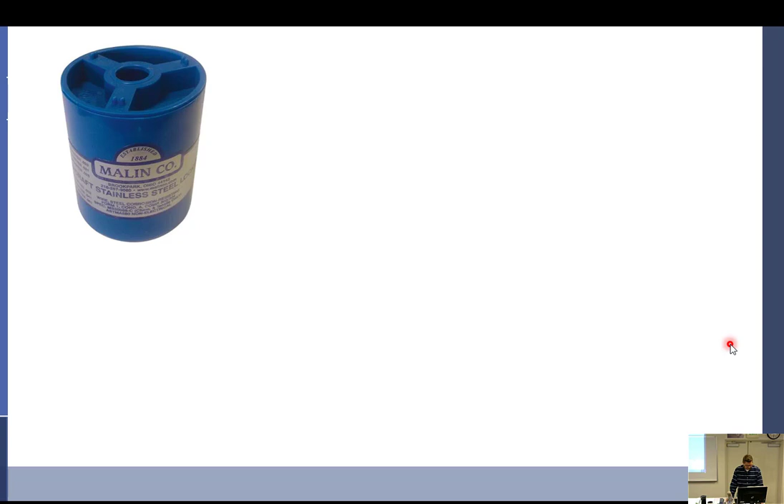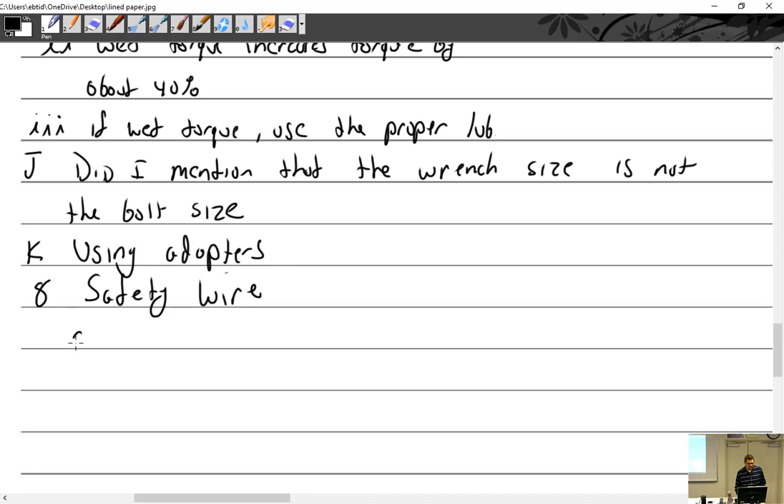Safety wire. All right, so safety wire comes in several sizes. Safety wire sizes. I'm being redundant here, sorry. And then why is that IV? I don't even know. So let's just fix this here. We'll just say this: safety wire sizes. It comes in 0.020. Oh, this is stainless. Stainless. So first of all, it is stainless steel wire.

What does stainless steel mean? Corrosion resistant. What kind of steel is that? It's a mixture, isn't it? Well, mixture is not the word I want to use. It's an alloy. So it's steel with a lot of additive, nickel. It's got a lot of nickel in it. Carbon makes it very brittle, so you've got to be careful. Carbon makes it strong but brittle.

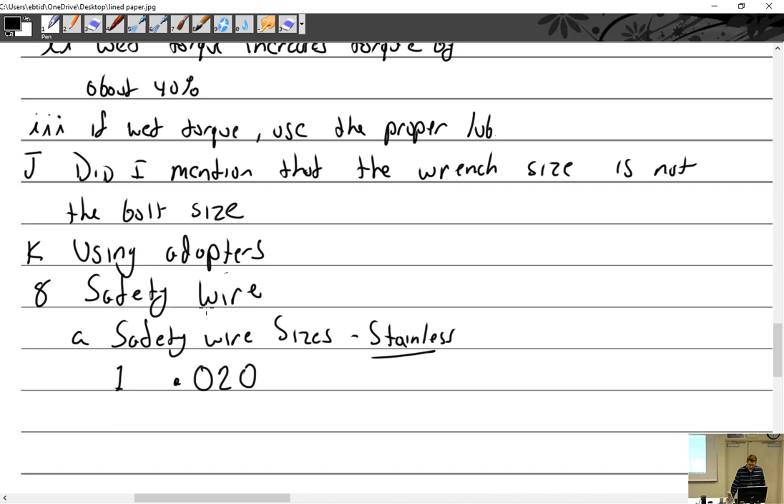So all right, 020. There's a lot more sizes, but I'm going to give you 3 of the main go-to. If you look at my toolbox, you're going to see 3 cans, and these are the 3 cans that almost every mechanic's going to have. So we have 020, and I'm going to give you the book definition, all right?

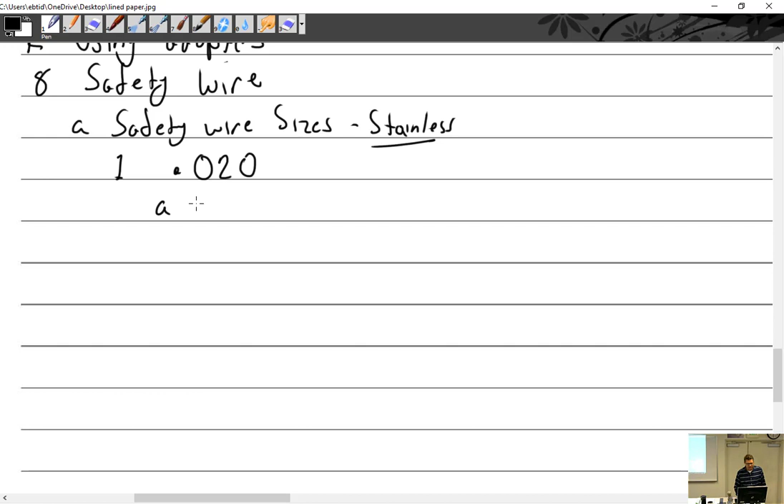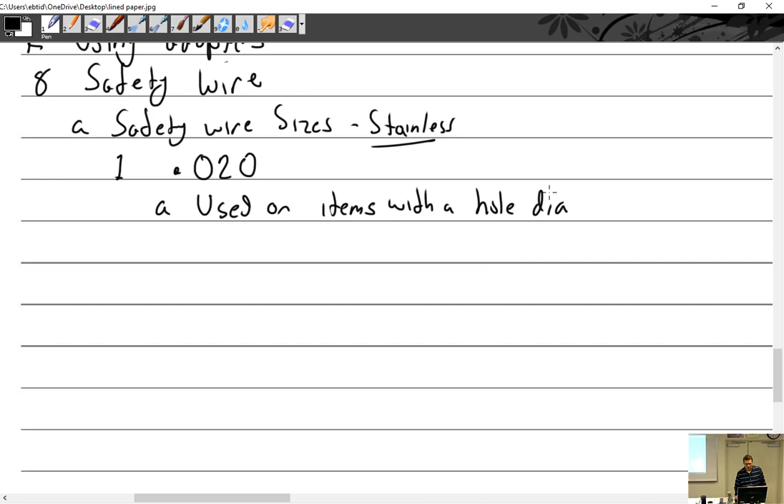It's just right out of the book: used on items with a hole diameter of 0.045 to 0.062 with, this is the key right here, spacing less than 2 inches apart. So if your screws are less than 2 inches apart and they have holes drilled in them that are between these, you could use 020.

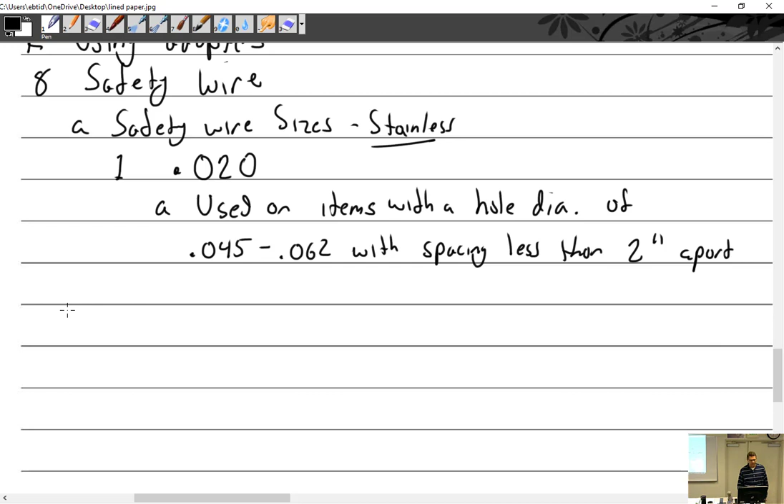Okay, the next one is 032. 032 is your most common. It's your go-to for pretty much 99% of what you do. 032 is going to be fantastic. The book says for hole diameter larger than 0.045. And I'm going to add this, over 2 inches apart.

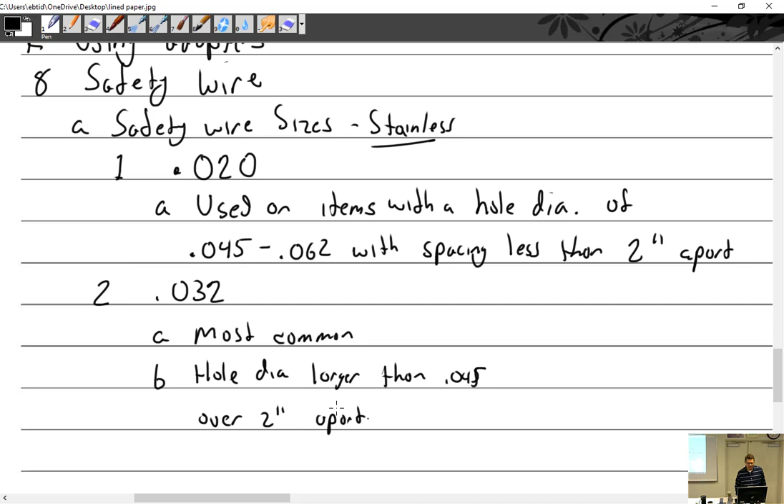Now do notice this is not an error. Hole diameter of 0.045 to 0.062, and this said hole diameter larger than 0.045. Well, 0.062 is larger than 0.045, so that makes little or no sense, doesn't it? But it's over 2 inches apart, so that's what we're going to do. So almost always I'm just going to grab my 032. I'm going to use 020 on little screws and small parts. Otherwise, I'm going 032.

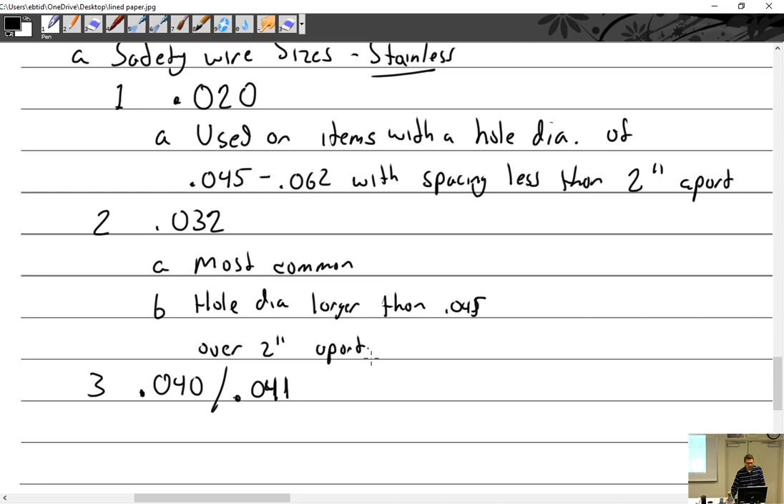If I don't use 032, I'm going to lump these together, 040 and 041. Yes, there really is a difference. I don't know the reason why, but they actually make 040 and 041. And this is almost always going to be used on propellers in general aviation. Typically used on prop bolts. One manufacturer, like McCauley, says we want you to use 040, and Hartzell says we want you to use 041. And I could have that backwards.

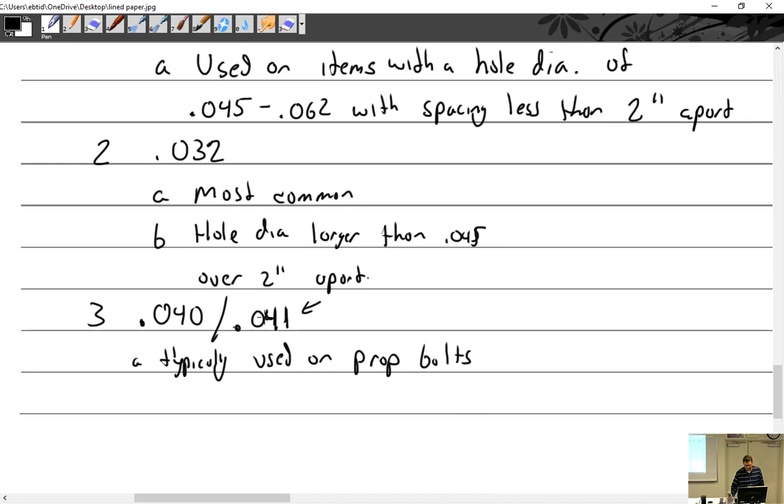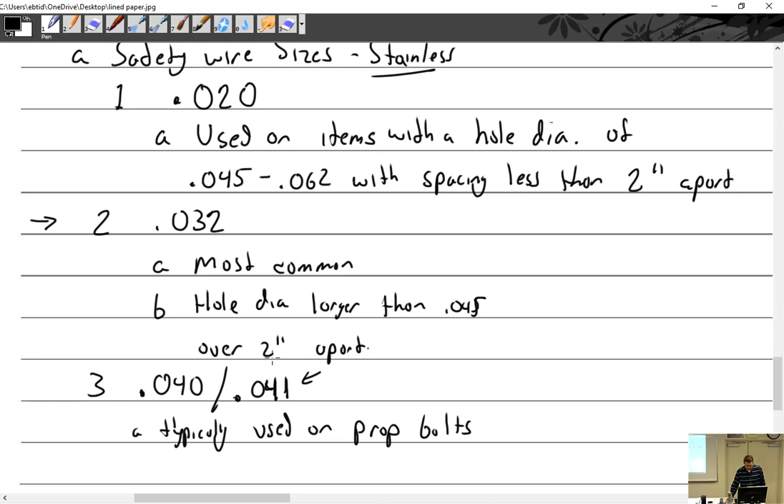It doesn't matter. So I don't buy a can of 040 and a can of 041. I buy a can of 041, because whichever one says use 040 or bigger, well, 041 is bigger. So it meets the specs for both. So those are the 3 most common types. The stuff you're using in lab is going to be 032. So I have 020, 032, 040, 041. And what is it made out of? Stainless steel.

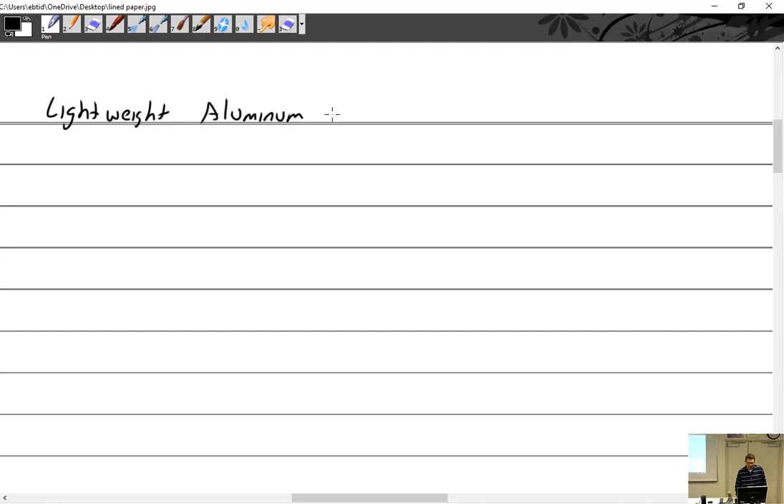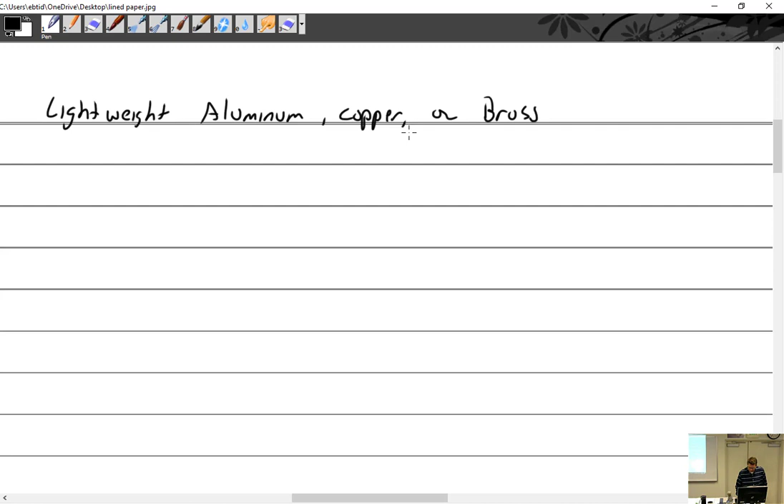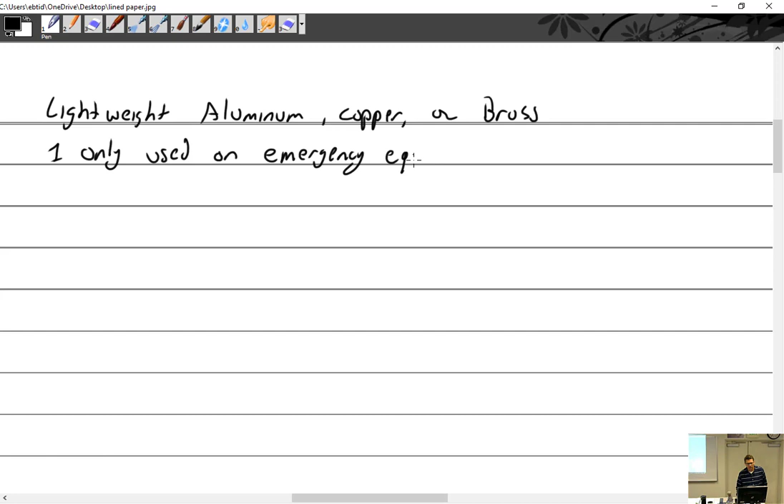In addition to the stainless steel, they also make another type, which is lightweight aluminum. Never actually seen this myself. Copper or brass. I'm not sure, it's just a gold color. And this is only used on emergency equipment. Like shear wire? Yep. Where wire must be broken by hand. What was the third type of wire? 040 or 041, I put it together.

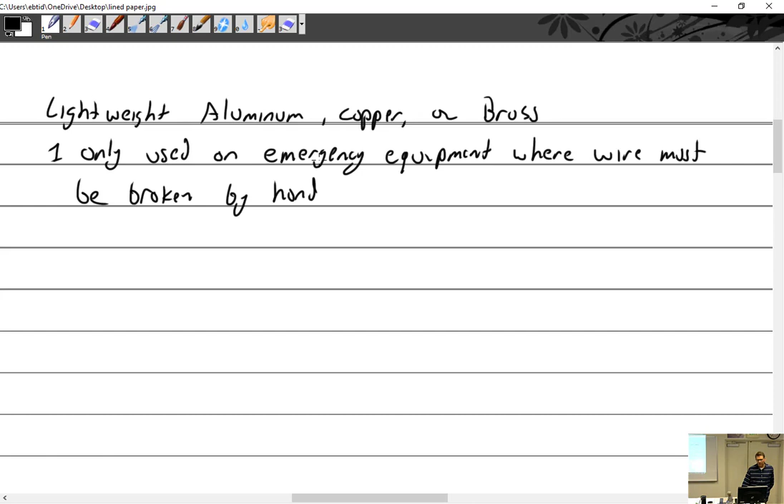There's actually a little more to that than just emergency equipment; it's equipment that must not be inadvertently energized. You'll see sometimes in cockpit switches that are actually safety wired. They don't twist it, by the way. It's just one simple strand on a cover. You lift the cover, you break it, you flip the switch.

You may see something like that on a fire extinguisher, on an escape chute, something where in an emergency it needs to be broken and deployed, but you want a piece of wire on there so kids won't yank it, or somebody will look at it and go, wait a minute, this is wired, I wonder if I should actually do this. All right. So used only on emergency equipment. All right, how to safety.

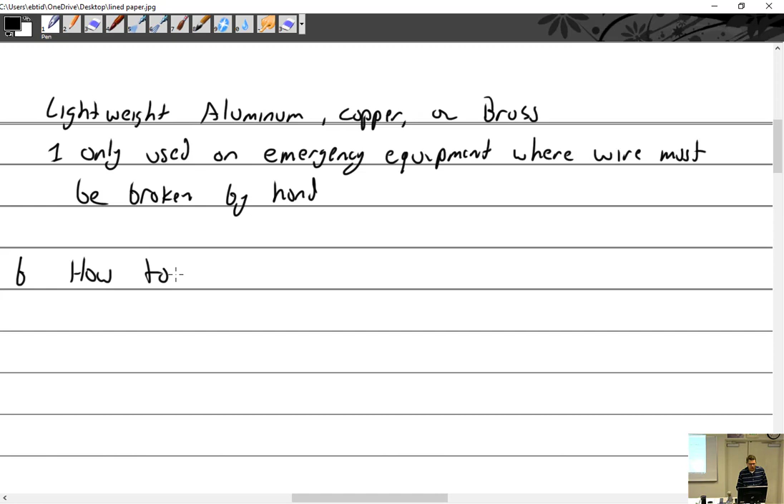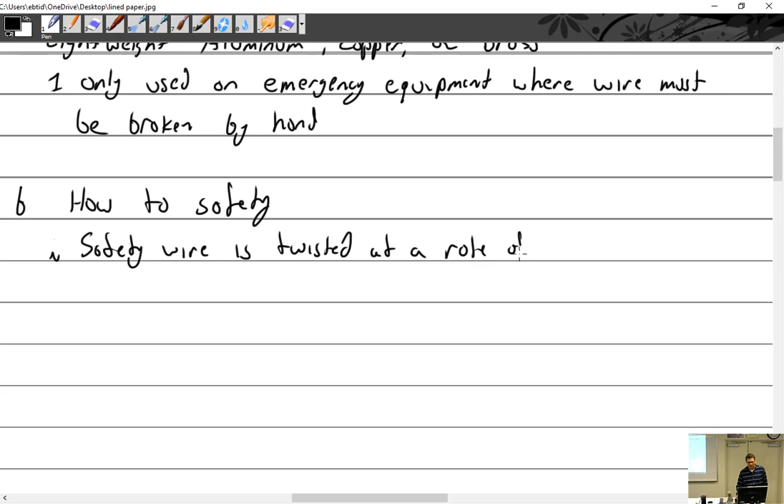How to safety. It's really hard to write how to safety, so I'm just going to give you some rules, guidelines, instructions. So safety wire is twisted at a rate of 6 to 8, not 68, twists per inch. How would I know if I have 6 to 8 twists per inch?

Rich is like, measure it. Well, he's right. You take a ruler and you put it against the safety wire and you look at 1 inch and you count how many twists you have. Because some of you guys will twist something and you'll give it, is this okay? I'm like, well, did you measure it? I can tell you didn't, because there's like 37 twists per inch.

So that's too much. You can use a single strand in some cases. Some cases allow for single strand. Means you don't have to twist it at all. Just run everything through all the screws. And that's really for smaller screws, things that are close together.

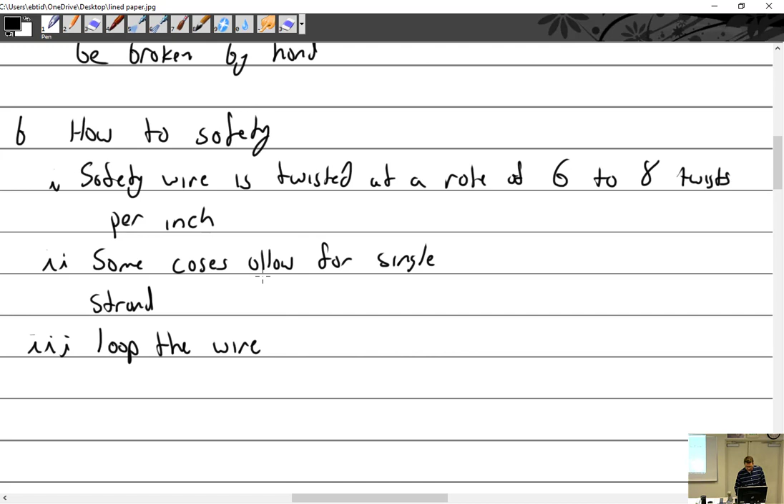But when you do safety, you should loop the wire around the bolt head. Around the bolt head. B-O-L-T, bolt head. Not over. When you are doing a castellated nut, you actually do go over.

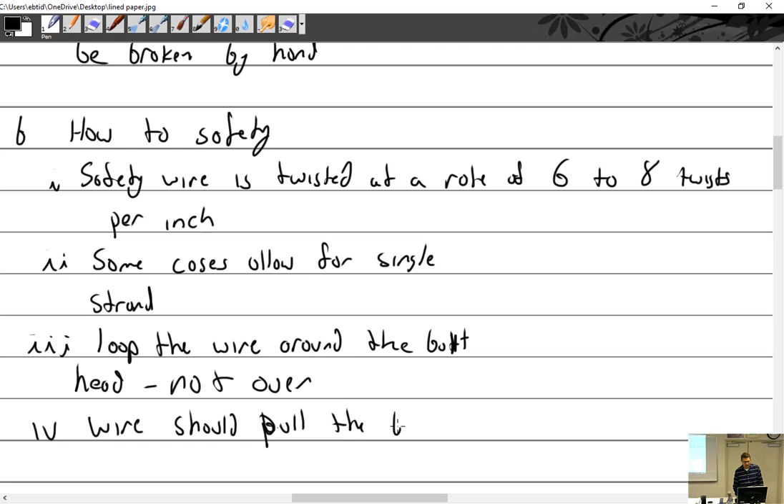Wire should pull the bolt tight. Should pull it tight. But we say there are 3 types of safeties. So 3 types of, I'm going to say pull. So we have the positive. And if you have a positive pull, you're doing what I just said. The wire should pull the bolt tight. So positive pulls tight.

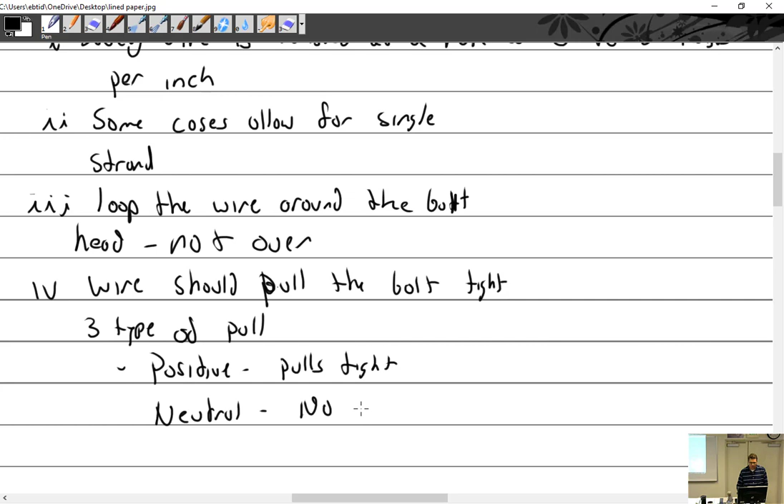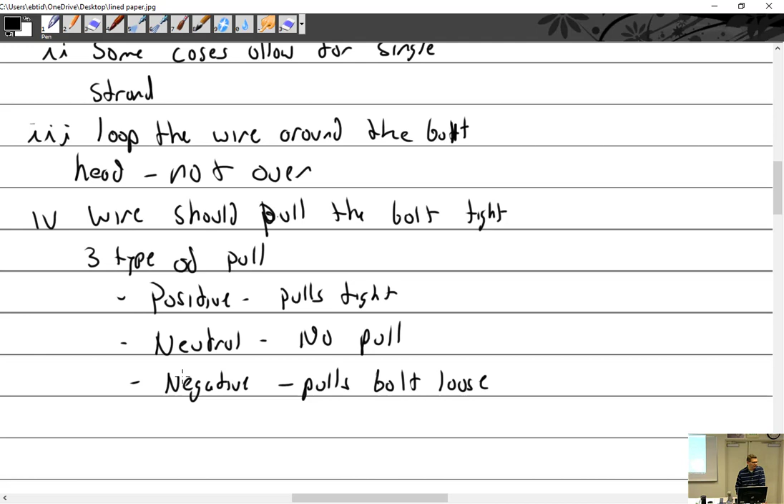We have a neutral, which has no pull. It doesn't pull the bolt loose or tight. It's just there. And then negative. Pulls bolt loose. Which one do you think is the best? Positive. Positive is best. Neutral is acceptable. And negative is bad.

All right. A couple more rules here. Do not over twist and then untwist. In other words, you're twisting your wire, twisting it to get it to hold. Like, oops, went a little bit too far. I'll just undo those twists. Yeah, I can see that.

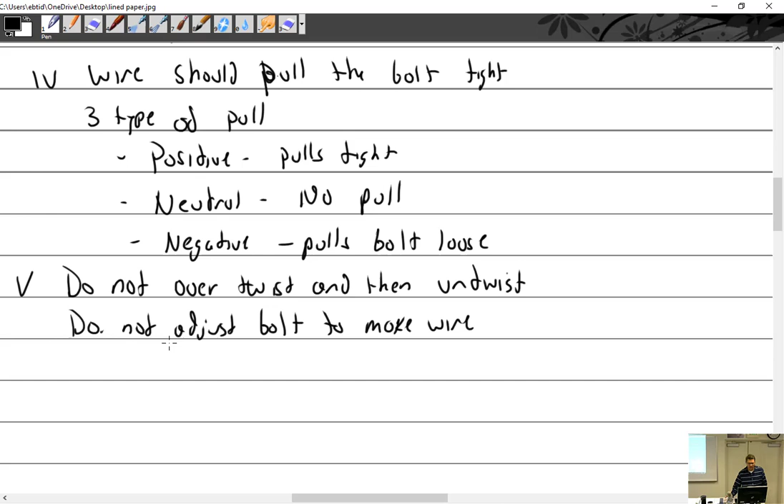Do not adjust bolt to make wire tight. We laugh, but I know mechanics who have done that. Are you kidding me? Let's see what else. Wire should be, so we have a positive here. Wire should be tight.

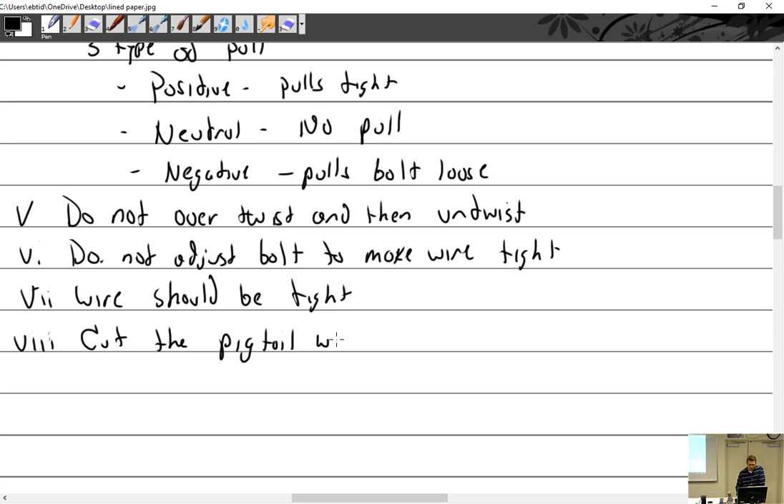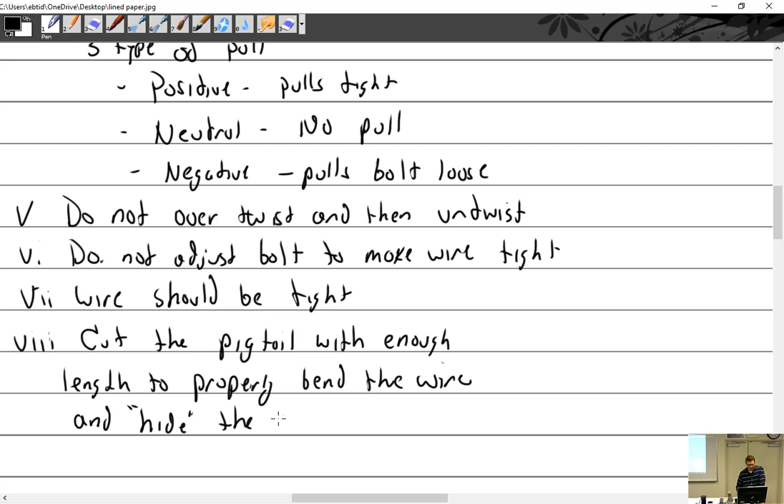You need to cut the pigtail. What's the pigtail? That's the end. Cut pigtail with enough length to properly bend the wire, and I'm going to call it hide, and hide the sharp end. That's very important. If you leave a pigtail out in an airplane and I get poked with it, I'm going to come looking for you.

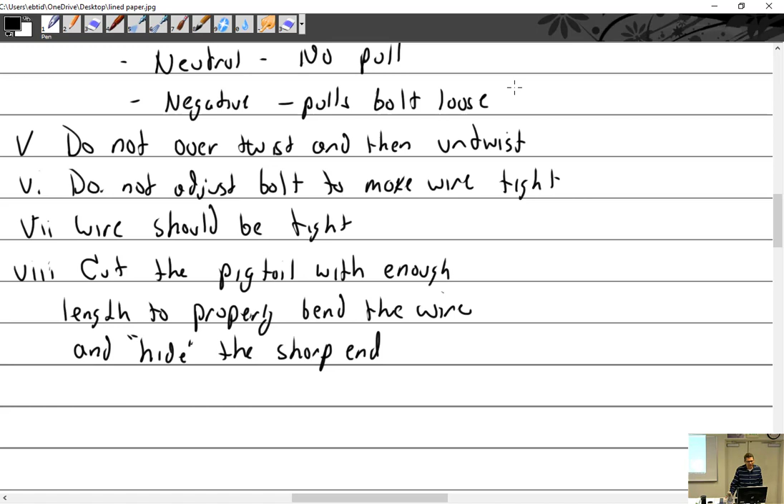For part 5, you said do not over twist and then untwist. What's the reason behind that? I don't really know what the reason is behind it. I think it puts kinks in the wire to begin with, which means that you have slack there. So if it pulls hard enough, there's slack. It really looks bad and looks unprofessional. I don't really know what the actual failure is. Wouldn't it ruin the integrity of it? I think it ruins the integrity of it, yeah.

Never reuse safety wire. Once you've used it, you're done. Unless you anneal it. That's a joke. Don't anneal it.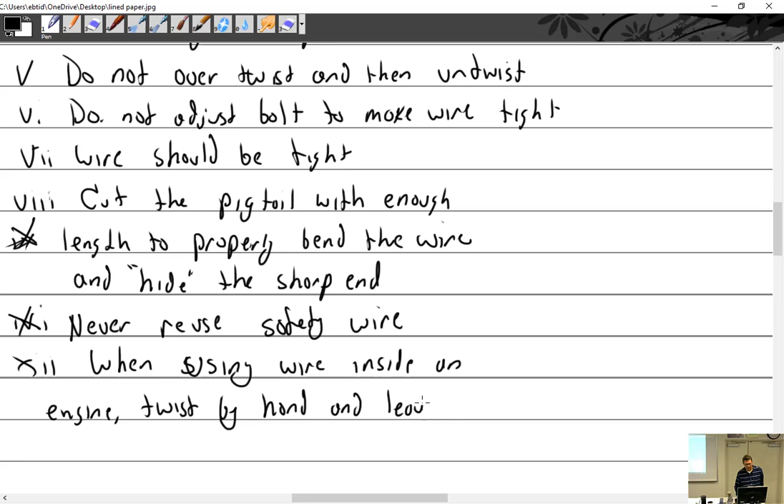You guys are learning to do it by hand. I'm not going to write this. Well, I might as well. When using wire inside an engine, twist by hand, and leave no tool marks.

No tool marks. So what I mean by that is if you use pliers or something on the wire, it actually puts what we call stress risers in there. So if you looked at it microscopically, you have your wire like that, and then you crimp it with a pair of pliers, it's actually going to put little stress risers in there. And guess where it's going to break? Right about there.

And then if you're inside of an engine, it's going to break off, and a piece of wire, especially the pigtail, will fall right down into the oil sump, gets picked up by the oil pump, destroys the oil pump, and spits it into the oil filter, probably, at least at that point. But then you scratch the oil pump, and now you have a loss of oil pressure. So it's really, really bad.

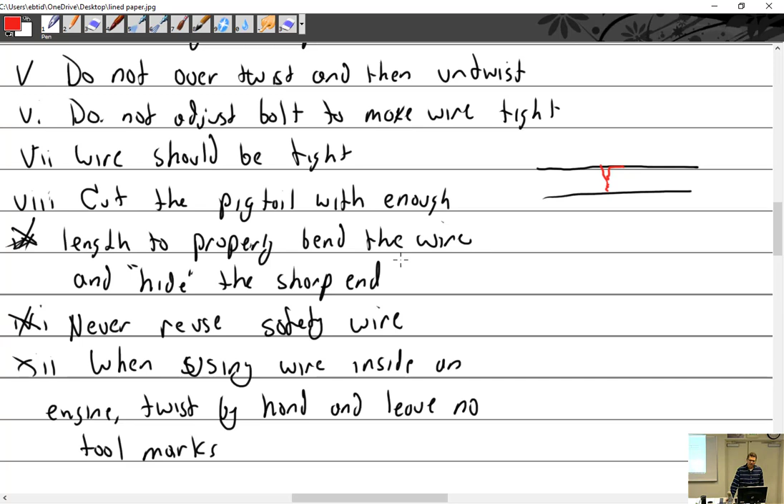So don't do that. When using wire on the inside of an engine, I only twist by hand and don't leave any tool marks. Outside of an engine, in most places, you can use the pliers. It doesn't matter. Everybody uses them. That's okay. But given those rules, sometimes it's easier just to look at some safety wire and discuss what's wrong with it. So with that in mind, let's look at some safety wire.

Okay, so this is out of 43-13. These are do's. So what is right about this? Righty-tighty, lefty-loosey. Everybody understands righty-tighty, lefty-loosey? Okay, this wire went through. Did it go over the head? No, went around the head. Like I said, it is pulling this way, which means this is going tight. And it's pulling this one tight.

And the loop here, how much should this loop actually be? Does anybody know what the book says? It says 6 to 8 twists, I believe. It says half inch is a little too short, so I go about 3/4 of an inch. So this is good. It's pulling it tight, just like they're all pulling it tight here.

Notice here the castellated nut, it went over the top. You should go over the top of castellated nuts. It is really difficult to run it through here because they're rounded and it never works. So castellated nuts, over the top.

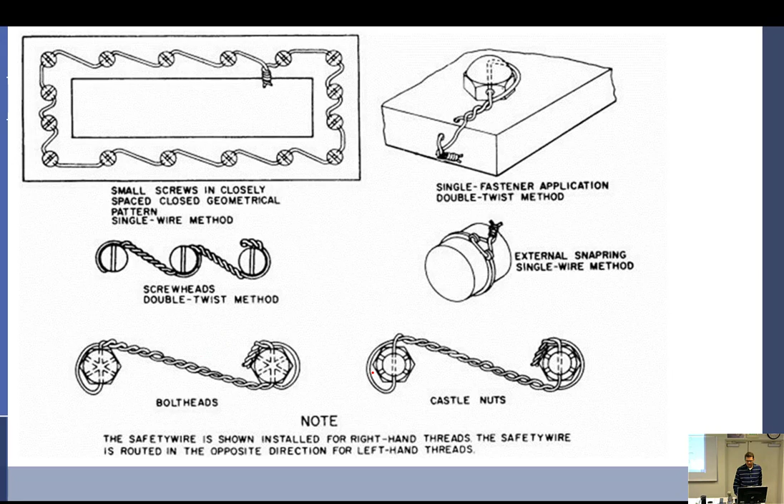What kind of pull is this? Neutral. Neutral, is that acceptable? Yes. Okay, so we got tight and tight. That just represents a single strand, but notice that it's still pulling tight. But you're not going to be doing single strands in here. This is the only picture I hate, castle nuts, because this actually shows it going around, and don't go around.

All right, now we get to have some fun. You want to hit the lights back there so everybody can see this? If you want to go to sleep, that's okay. I won't say anything.

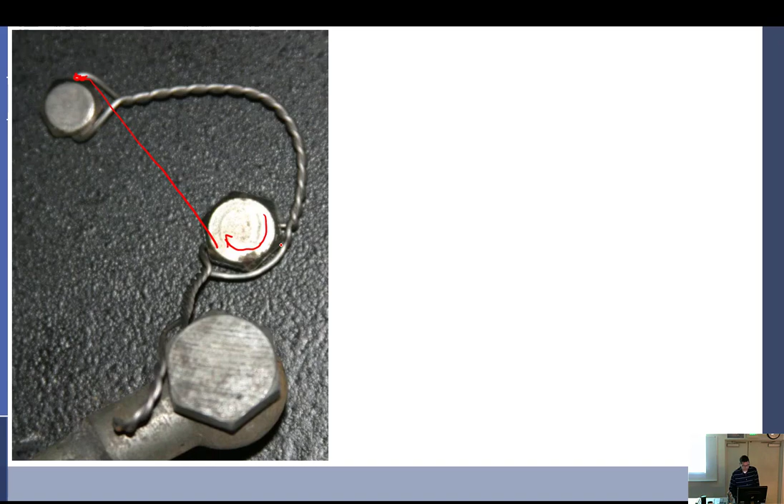It's got to pull tight. So, it should go from this spot, righty-tighty, lefty-loosey. So, it turns this way, right? So, it should start here and go over to here. I don't know what that is. That's just horrible. You see that? He obviously wasn't from this school.

I hope not. Most of these I stole off the internet.

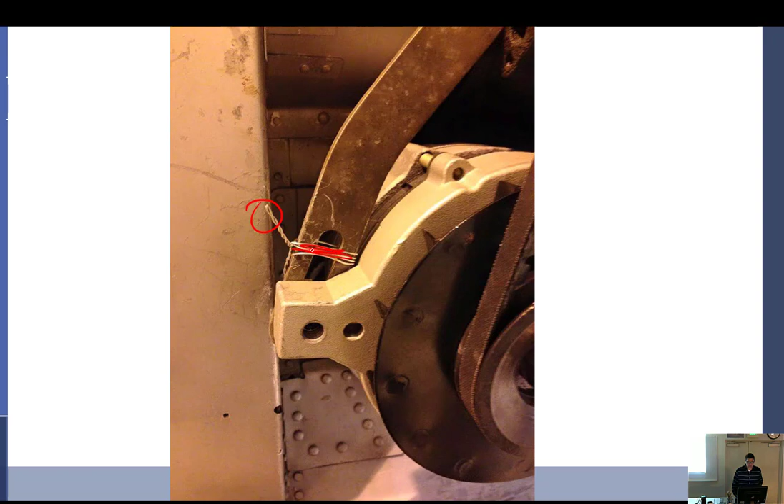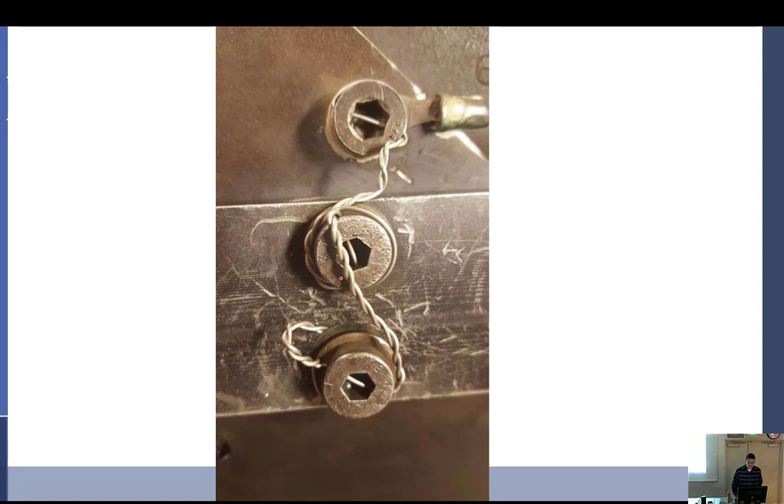Okay. What is that? There's a bolt on the back side of this. And so, I don't know. I think, first of all, that sticking up is probably what really irritates me the most. Other than the fact that this is just wrapped around here and it's just going to slide down and serve no purpose. So, there's just so many things wrong with that. That's just a mess.

They did 3, but it comes from here, comes around, goes through here. They tried to make a positive pull, but then they just went over the top here, which doesn't make any sense, and back over to here. And which way, let me see, righty-tighty, lefty-loosey. Is it loosening or tightening? It'd be loosening the third one. Oops, I just made the same arrow twice. So it's going this way. Sorry, it's getting late. So that is loosening that. So, all right. Hopefully you're seeing.

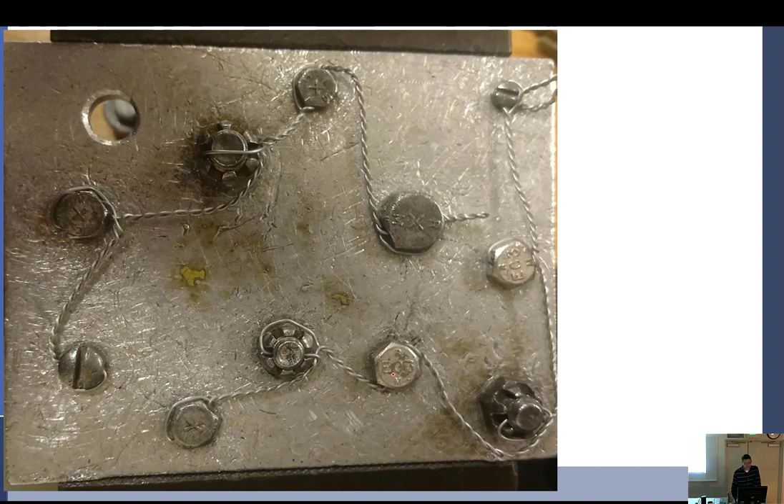Anybody recognize this plate? Who has this one? Was this you? No. Okay. So I don't remember exactly, but I remember a student actually bringing this to me saying, "Is this good enough, Kev? Is this good enough, boss?" And I said, "Oh my God, I've got to take a picture of this. This is awesome." And I said, "You do realize that this is not a good picture I'm taking. This is not because it's so perfect."

So I think we've got a sharp point. It's just, where do you begin? Okay, this is at least going tight, and that's going tight, but that's not tight. And then you've got something coming out here and over here. I hate that. And then a weird twist here. You don't have a twist come here and then a twist go there. The twists come in this way and go out the other side. So, yeah, see, it's all rubbing each other there. This is an embarrassment. So please don't make me take a picture of your project and put it up on here.

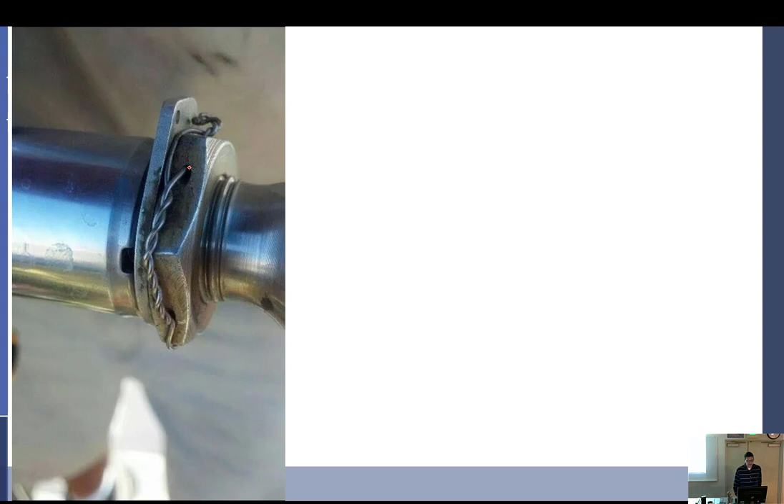Well, this looks nice. Okay, we have 6 to 8 twists per inch. Pigtail's a little short, but there doesn't look like anything wrong with this one. Is this a good example or a bad example? Why is it bad? Well, right here, this is what you do if you don't want to cut safety wire to get the bolt off. Because notice, this is the same nut. It goes through this hole and goes to here. It's the same nut. So what is it safetying? Itself. It's supposed to go through this hole up here. So even if your safety wire is really cool, make sure it actually has a function.

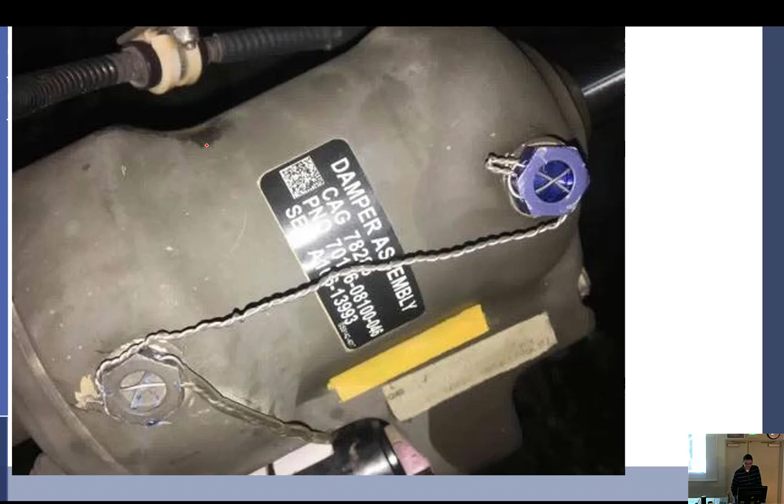That's a damper. Yeah, it's a damper assembly. Okay, this is allowed to crisscross, and I can show some of you. That's kind of loose and disgusting. It's just not great. I think it's kind of doing the job.

Yeah, notice how they do have spaghetti tubing here to protect the component. So they kind of tried, and I found it on the internet. I'm like, whatever. I don't know.

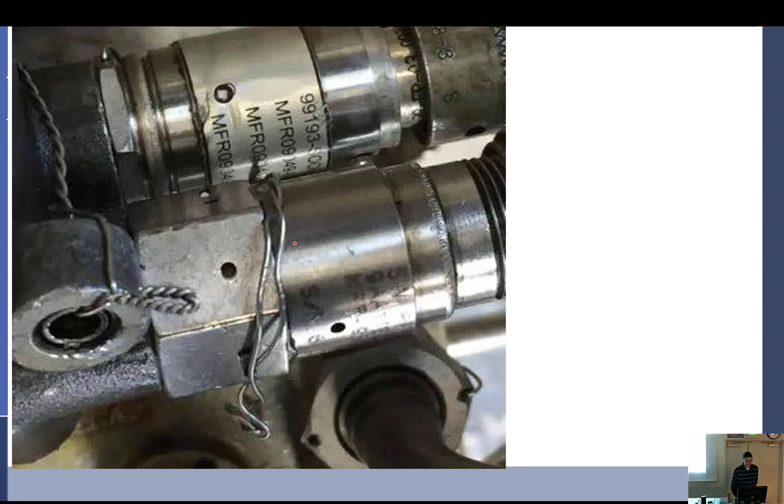Can you figure out what's wrong with this one? Okay, here's the safety wire. Oh, it's not twisted. There's tool marks in it. That's bad enough, but you know what this hole is for? That's where the bolt goes. Yeah. So you're gonna need a bolt with some sort of relief put in it. So that's kind of funny. Yeah, pigtail's beautiful. Got a safety, boss.

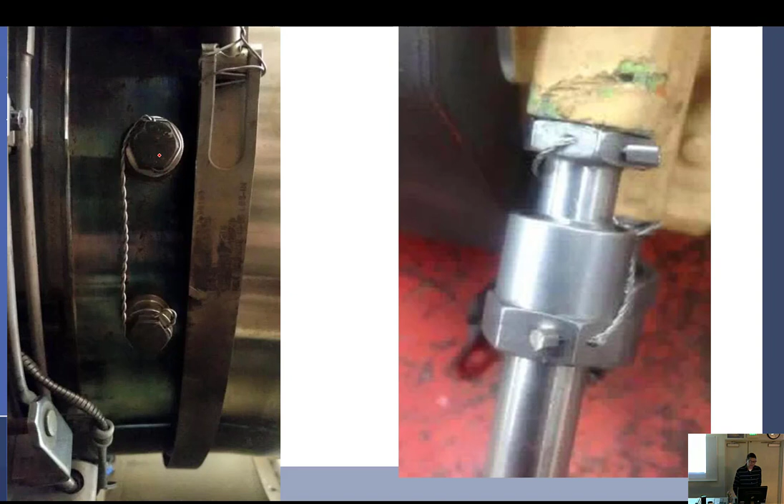Let's see this one here. Negative and negative. You can't do that. What is wrong with this one? Also negative. This bolt is tightened this way up against here, so it's pulling it loose. It's also safety cable. Yeah, it's safety cable, but you get the idea. I had to write this one in because I'm like, what?

Too bad about the electrical. I'm looking at it, I'm like, this is actually really nice with safety cable with these ends. It comes through, it's pulling it tight, you got everything looking great. What's wrong with it? Oh, they pinched all the wires underneath this part, coming through here, and just smashed all the wires as soon as they bolted it on. So you're gonna have to fly around holding the circuit breaker in, otherwise the component won't work. Good, I'm glad you liked that joke.

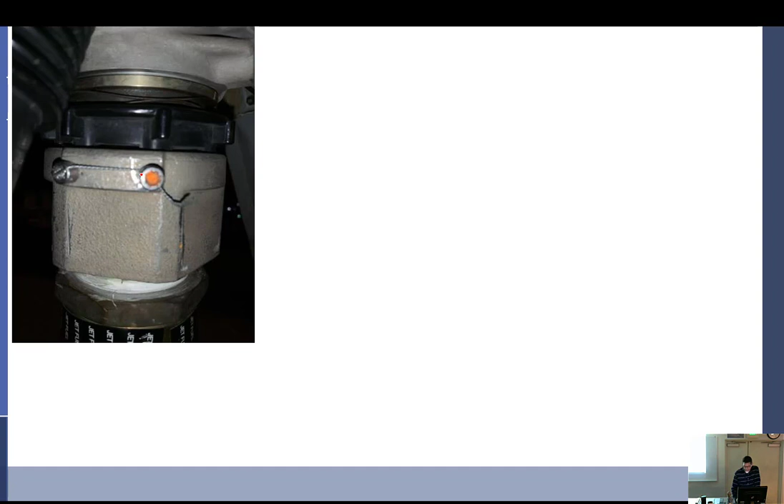Okay. So the pigtail might be excessively long. That's good. What the hell is this? All right, just don't be these people. I don't know, this isn't a very good picture. I can't really tell what's going on. I think it's just because it's a negative pull right there. Oh, that's what it is. You've totally missed the holes here. Just put it here and wrap it down there. And, all right, duct tape. Nice.

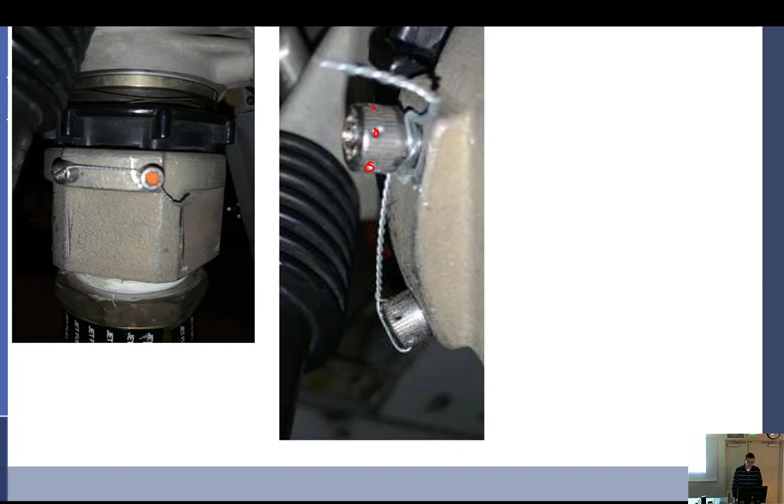All right. The wrench size is not the bolt size. Bolts are installed with the head facing up. So when you bolt something in an aircraft and you have a hole, the bolt always goes this way, or forward. So think about it: gravity holds it in, air pressure holds it in. And then they go from the outside in. I don't know how they figure that out, but I figure if nothing else, it kind of makes like a little winglet out at the end. So bolts go this way.

Also, the wrench size is not the bolt size. And do not use self-locking nuts in areas where the loss of a nut can result in an engine failure, turbine engine inlet. And some of you might be on your way to this. Remember that the wrench size is not the bolt size.

So, 6 to 8 twists, but there was one that was tight in the beginning, and then it got loose at the end. So is that acceptable? Don't average. No part of it can exceed 6 to 8 twists per inch, because if you twist it too tight, the wire will crack there and break off. Okay, because on that picture you said it was okay, but it was tight, then loose, but it had the 6 to 8. What do you mean by tight? Was it pulled tight? No.

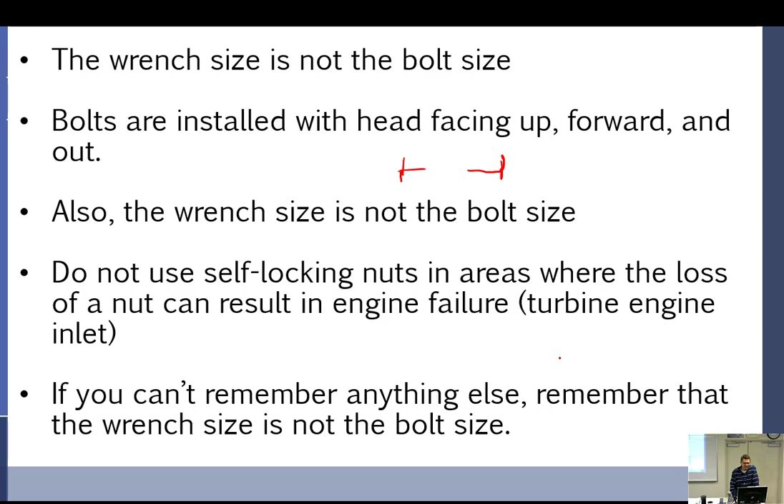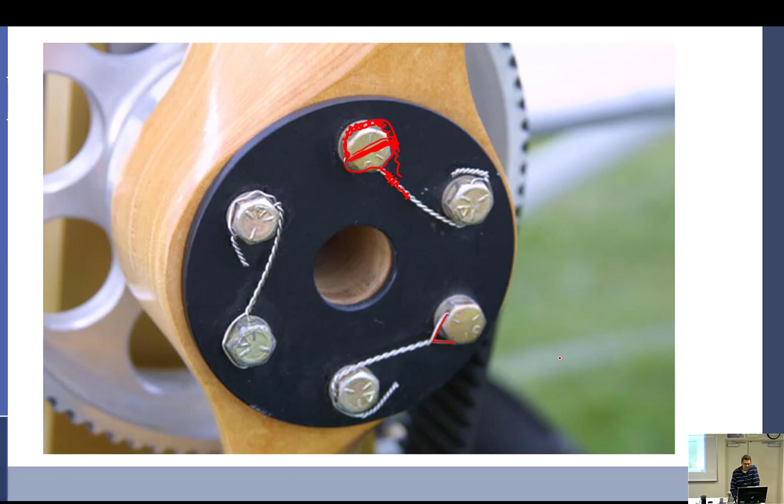The twists. Too many twists? No, it didn't have too many twists. It's just that it was real tight in the beginning of it, but then it got loose. One of the pictures I had? Yeah, it was one of the pictures up there. Tell me when. That was the first one. It was one of the ones you said looked okay. This one? No, this one. Yeah, that one.

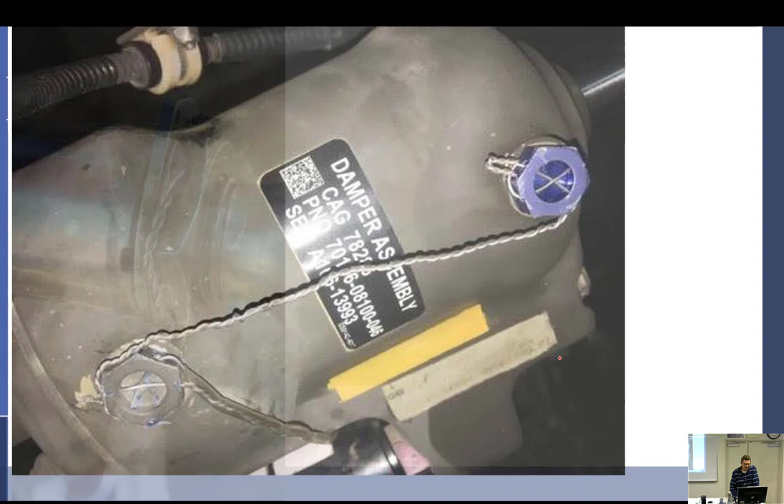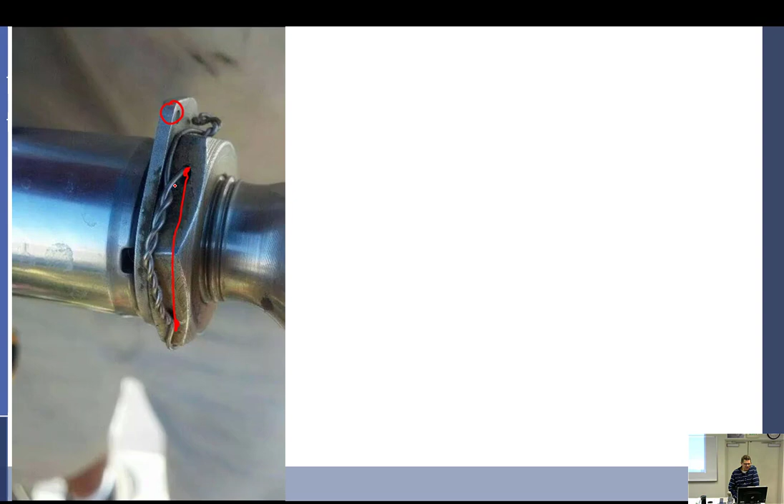You see how it's tight at the bottom and then it loosens up at the top. Oh, yeah, that's okay. There's 6 to 8 twists all the way through there. Remember, this is a close-up picture, so that little space right there is really not much at all. Oh, okay.

I guess that was it. All right, so what else do I have to cover here?